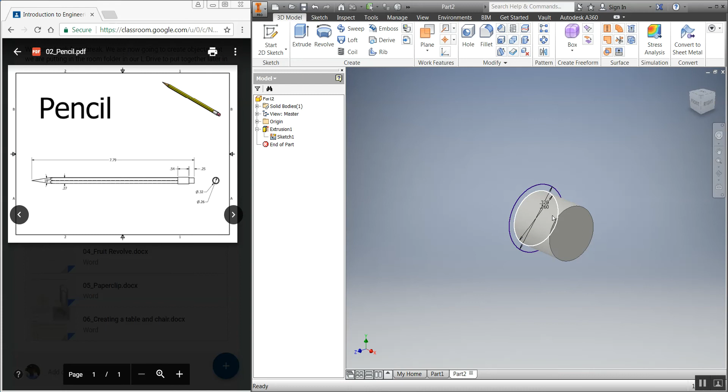If I did not have it visible - I'm just going to undo that - and go to extrude, it's going to give me an error saying it doesn't see any sketches, it doesn't know what I want it to do. So again, I'll right click it, turn on visibility, then I can go ahead and extrude again.

I'm going to flip it to the other side so I can see what I'm doing. I'm going to click at both circles, and you're going to see that it first thinks maybe it should cut that part off, but we don't want that. It's going the wrong direction to begin with, so when I flip directions, it now goes to the join or create command. So the second one was cut, the top one is make.

And we want to make it at 0.54, and that is the metal part of our pencil. Once we have those two done, we have no need to have that sketch open anymore, so we can turn visibility off, and now we can continue on with the rest of the pencil.

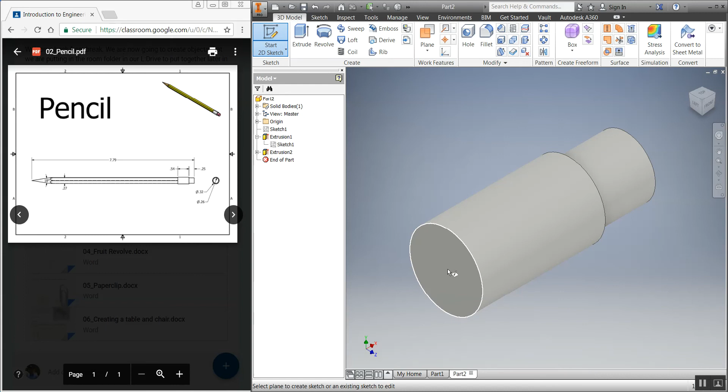The next part of the pencil is a polygon, and it's 6-sided. So what we're going to do is start at the edge and create another sketch. I'm just going to click on this surface. If I click on the down arrow at rectangle, I can go to polygons.

I'm going to click on the center, and then come out. I'm not going to let it snap onto anything because I want to make the size of it after I've already created it. So I'm going to click on the top and then the bottom, and I can dimension what the side should be, and that was 0.27.

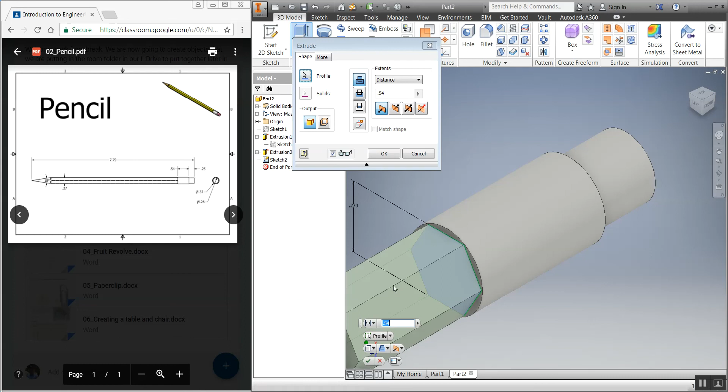Now that I have my size, I can finish the sketch and extrude that, and it's going to be 7 inches for the rest of the pencil.

Now you're going to see I have a generic pencil. I could start coloring it or designing it, but I'm going to wait till later to do that on my own.

But once we have all that set, we can start cutting the angle for the tip of the pencil. So there's two things that I'm going to need. I'm going to need a line that we revolve around.

So since I set this up with that center dot being the yellow dot, I can use this axis. I can right click it, turn visibility on, and then go to my sketches, and I'm going to want to figure out what sketch cuts through it.

So I could use the XZ or the XY plane. I can use either one of those and just turn the visibility on, that way I can see everything I'm working with. I'm going to click on sketch, and you've got to be over the edge of the plane. You can see that it now says XY plane on there, so it knows what I'm trying to select, and then I can start doing some of my drawing.

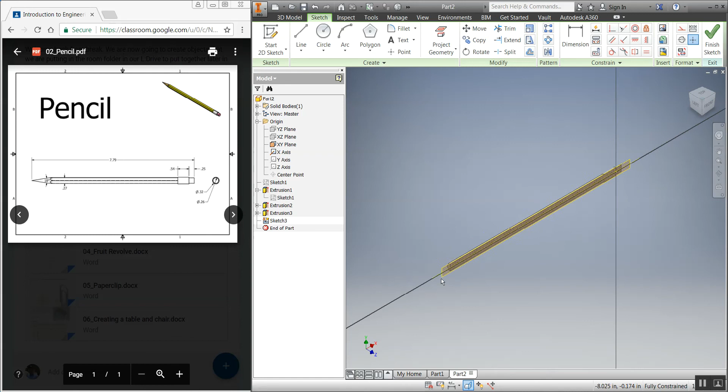First things first though, I want to know the area I'm drawing in, so I hit F7 and it cuts it in half. If I zoom in there, you're going to see I only have half a pencil now. From here I'm going to do project geometry, that way I can get the full height of my object, and that just puts a line on there for me on my sketch.

That's just so I can have my reference point, because what I'm going to do now is make a line on here. So if I click there, I'm just going to go over and make a line. I click and hold the mouse down to move it over, and now that I have my line set, it just has to be longer than my material. I can click tab, and since the full height's supposed to be 18, half of it, since I'm revolving it, is what I need, so I need 9 degrees.

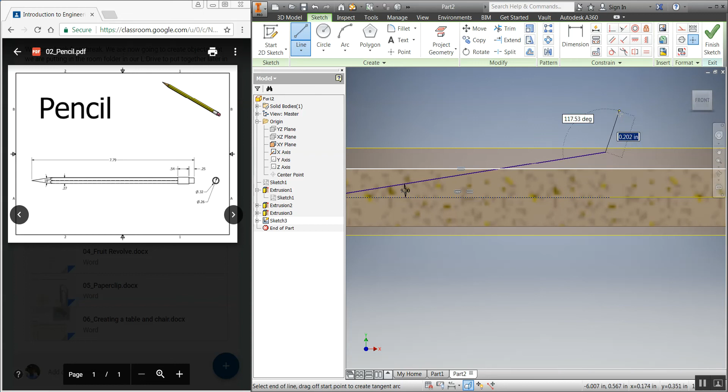Hit enter, and then you're going to see that I have the line to revolve cut. Now the rest of this doesn't matter, so it can be any shape I really want out here, just as long as it covers all of the area that I need and it does not go past my center line to revolve around. So it can be any shape I want.

Now I'm going to use the revolve command. It did not pick the area for me, so I've got to click on it. So what it did is it clicked my profile, and then now I need to click on axes so I can use the line to revolve around. You can see at first it wants to make some random shape, but instead of the create or join command, I want to have it be a cut. Then I click OK.

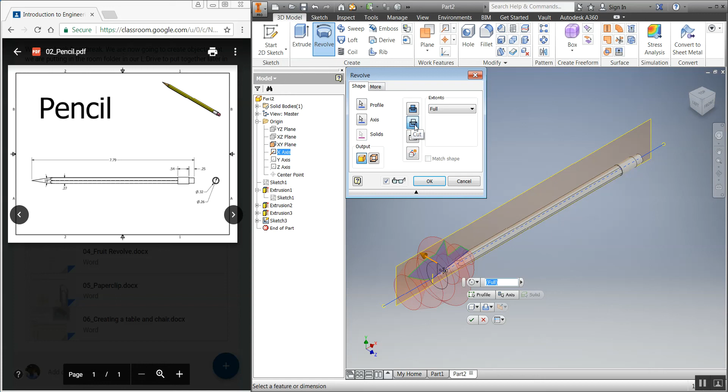And there we go, I've got a pencil. One little fun extra thing is if you wanted to have two different surfaces here, that way we can have the lead of the pencil be one color and then the rest of the material be another.

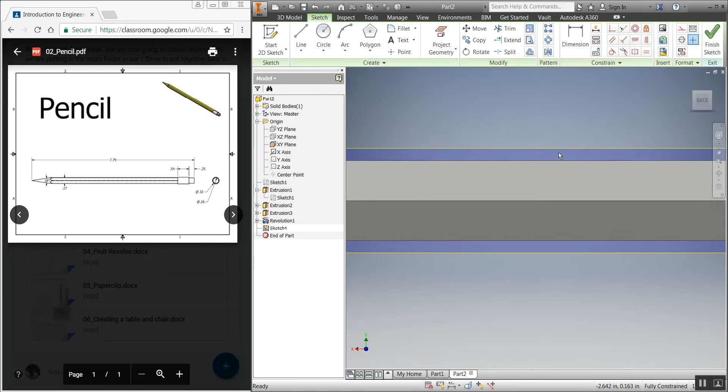We can do the same thing that we just did, but instead of using most of the part, all we're going to do is go over to this side of the pencil and make a little triangle to cut into it. So it's just going to be the tiniest little cut into the material. Going to finish that sketch.

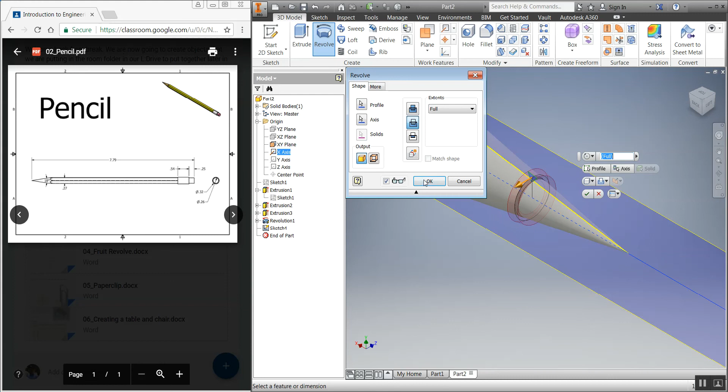Going to go ahead, hit revolve. It picks my profile, and all I have to do is pick my axis, tell it to be a cut, and I hit OK. If that's a little too far in, all you got to do is hit the plus sign next to your revolve, double click, and now I can go back into that area.

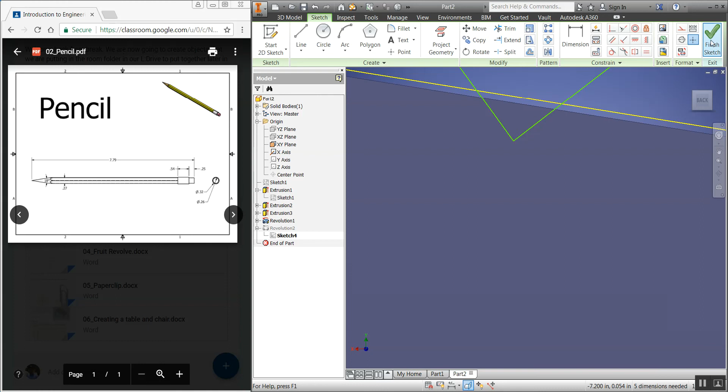Click F7, just zoom in further so I can make this triangle barely into the material. Click Finish Sketch, and then it does the same thing, it's just a lot smaller of a cut.

Alright, once we have that done, I'm going to go ahead and right click, turn visibility off on both the axes and the plane, and there we go. All you have left to do is color it. Have fun.